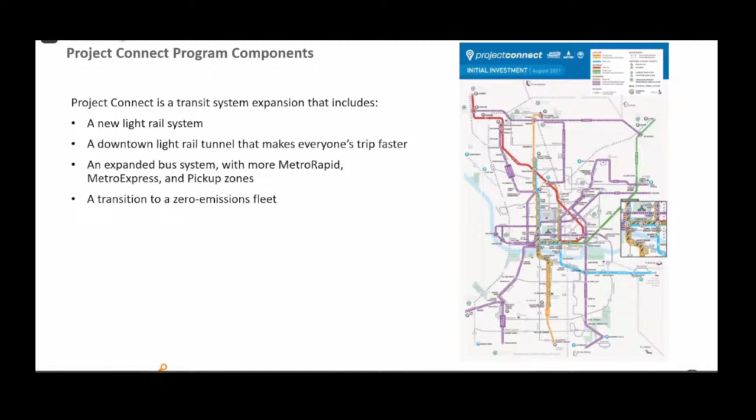So what do we mean when we talk about expanding transit? Do we expect that 100% of the people will ride our buses and trains 100% of the time? No. But every time we take a car, especially a single rider car, off of the road, everyone benefits.

Take a look at the little orange and yellow section of this moving image. Here you can see a lot more cars on the roadway, limited bus, and no dedicated transit lanes. Here we're only able to move 126 people through the roadway during each light cycle, assuming that 80 of them are riding transit.

On the right, with the blue-green side, we have fewer cars, a couple more buses, and a lane dedicated to transit. In the same light cycle, we can move 235 people through, with 204 of them in transit. That's more than 100 people getting through the intersection in the same light cycle. If you've ever sat behind anyone trying to get through light cycles and dreading that yellow-orange light, imagine 100 more of us being able to move through more effectively.

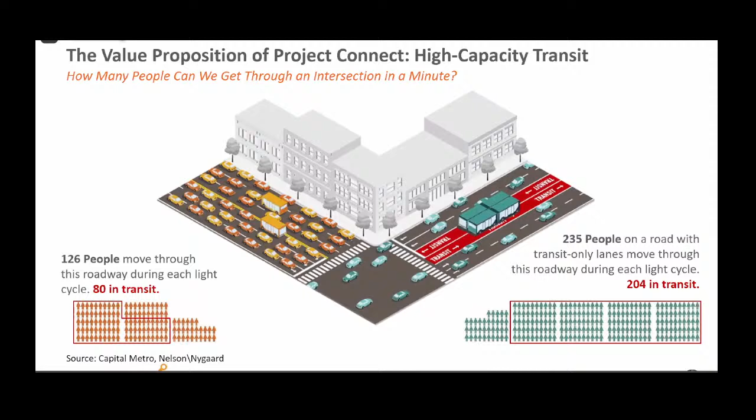What we like about Project Connect is that it reflects our community's values. We have opportunity and equity. Project Connect has already created thousands of good local jobs and will continue to do so, and it will provide more access to healthcare, education, employment, essential services, and entertainment, and will also create and maintain more affordable places to live.

Our second value is environmental sustainability. There's a shared passion in our community for the environment, and that's why our commitment to environmental and sustainable practices is core to Project Connect. We are already working towards our zero emission fleet and will continue to lean into the challenge to conserve and protect natural resources in the decisions we make.

And then finally, we have innovation and technology. Technology and innovation inspire much of who we are as a region here in Austin. Project Connect will embrace that spirit, making transportation smarter, more efficient, enjoyable, and easier to use.

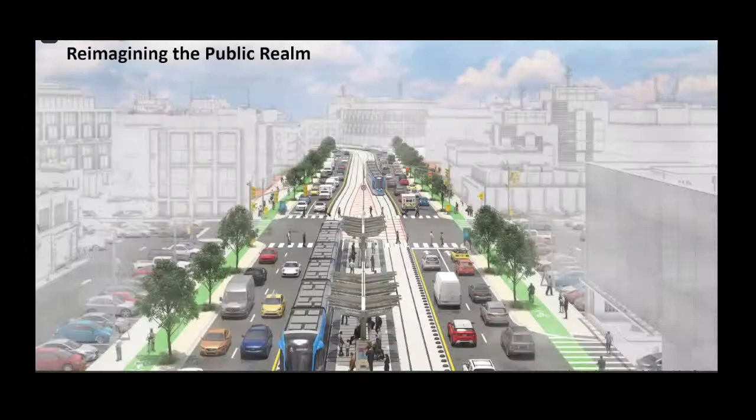And speaking of innovation, this project gives us an opportunity to reimagine the public realm. Here we have an artist rendering as an example of what transit could look like when the light rail system coexists with cars, bikes, and pedestrians.

It is an opportunity for us to bring local voices to the design table, like you're doing tonight, to improve accessibility for everyone while incorporating what makes us Austin, with public art for the average customer to appreciate daily, and for visitors to get a sense of who we are in Austin and how we work to keep it weird while we keep it moving.

And finally, you may be asking yourself, where are we in the process? We've completed 15% design so far, and here are our key milestones. We have entered into the project development phase for the Federal Transit Administration.

In the summer of 2022, we will have a draft of the environmental impact statement and our proposed 30% design. As my colleague Lonnie likes to say, we're baking it in clay, so the clay is not quite baked yet.

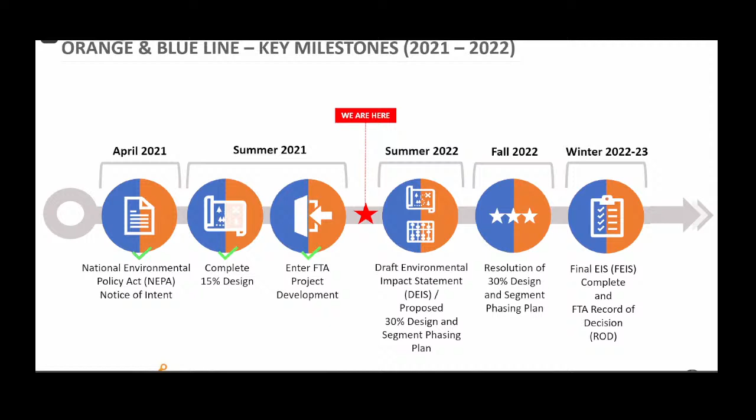By winter of 2022-2023, we aim to have our final environmental impact statement with a record of decision from the Federal Transit Administration. So with that, I'd like to turn things over to the woman behind the magic, our Deputy Project Manager for the Blue Line, Ms. Lindsay Wood. Thank you, Jocelyn.

I'll start with a high-level overview of the Blue Line project, just to set the context for the conversation as we dive in here today.

The Blue Line runs from downtown, from Republic Square to the airport, has a dedicated transit way, shares much of Metrobus Route 20, includes 10 planned stations, of which 2 are underground, 7 are at grade or at street level, and 1 is elevated at the airport.

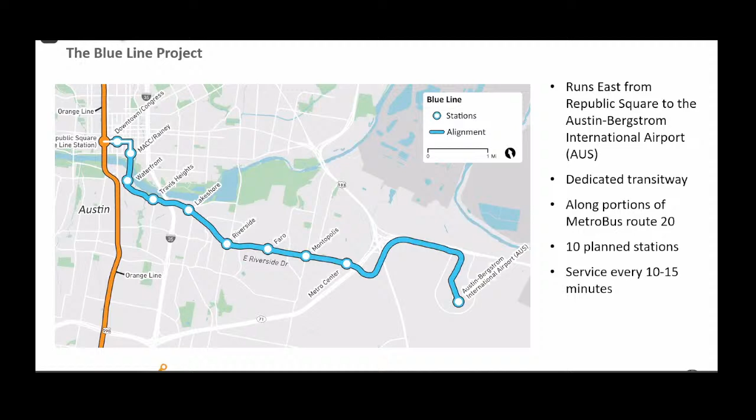And the service is planned to run every 10 to 15 minutes.

As part of the Blue Line, we have identified this area that we're going to be talking about today, covering the East Riverside Working Group study area from Faro Stations, Montopolis, the MetroCenter station, and to the airport. We'll be talking about the park and ride location identified in this portion of the corridor, and update everyone with the location of the station and park and ride that was not identified at the 15% level, but has since been evaluated, and want to discuss those updates.

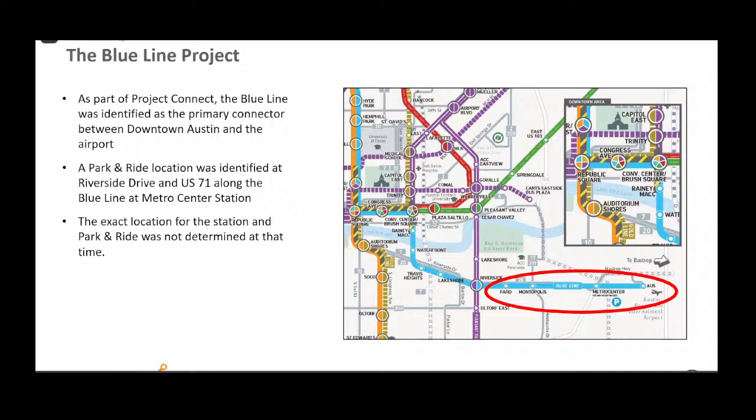I'll note that these plans we'll talk about today for the MetroCenter station, as well as the park and ride, and really the light rail as a whole, serve as the anchor for the East Riverside Corridor Master Plan, and are very consistent with the East Riverside Corridor Plan that included transit and a station in this area for the MetroCenter.

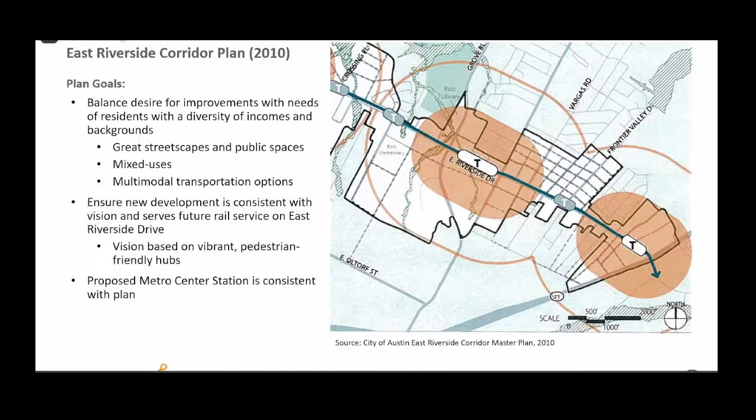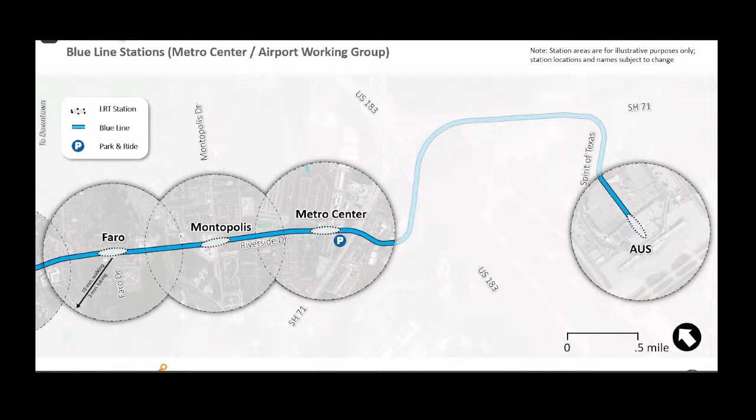So we're going to dive in shortly. I mentioned that we'll cover the area. We're going to start at the airport and work our way west and talk about that end of line station, then how we get to the MetroCenter station and the proposed park and ride, as well as cover the areas just to the west for the Montopolis and Faro stations.

Before we dive into the actual engineering drawings, I want to give a little bit of a guide into what you're about to see. We're going to walk through the design files themselves. Remember that these are live design files, draft, work in progress. You're getting a preview before we've actually even submitted the draft 30% designs that Jocelyn talked about in the program schedule a bit ago. So these are really live action, and we're seeking your input and feedback as we progress the designs.

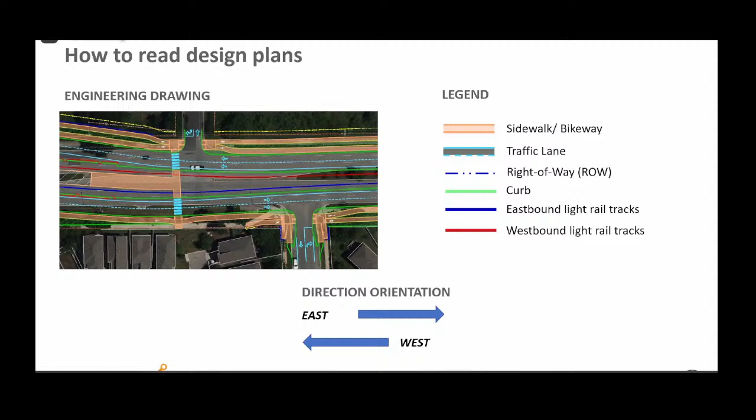So what you'll see are the aerial backgrounds, and in orange are the bicycle and pedestrian elements, so sidewalks, bikeways, in some cases a shared use path. You'll see the traffic lanes outlined in blue, the right of way in dark blue. The green indicates curbs, which may be the curb along the transit way as well as the outside curb along the roadway. And in the middle of the street, center running through here, you'll see the actual light rail tracks, with eastbound toward the airport in blue, and westbound toward downtown in red.

As I said, these are truly live action, in progress designs. There's much work to be done. We have a long ways to go between now and when this gets built, and this is the perfect time for community input and feedback. We really look forward to having a conversation about these concepts.

I'm getting excited, Lindsay. You know, when you get to this slide, it looks like that's it, folks. Thanks so much. But actually, no, we're going to take you in for a deep dive today, and we want to make sure you have an opportunity to participate.

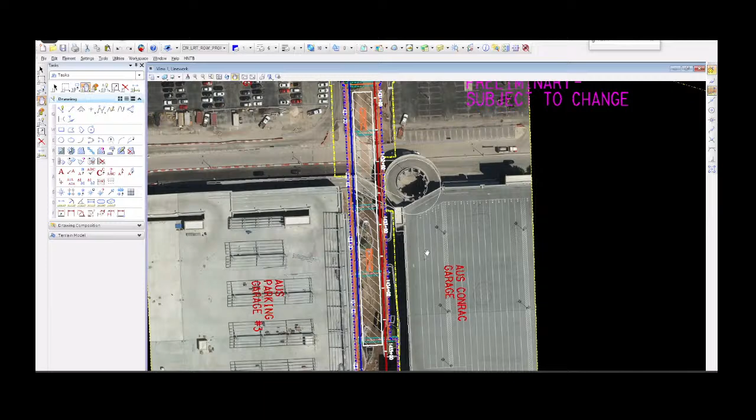All right, so it looks like we're looking at a space capsule. Where are we? We are at the airport. So our design begins with our connection to the airport. Here, what you see in the middle, that kind of hatched rectangle with the stripes on it, that is the station platform. And the context of that, how it fits in and what you will experience as a customer, is that this

platform is elevated about 30 feet high in the air. The reason for that is to connect directly to the planned future pedestrian connection into the terminal expansion that the airport is planning. So you would be able to get off the train, walk to the end of the platform there, between the two existing parking garages, with the blue garage on your left and the Conrac or rental car facility garage on your right, and walk straight due south into the terminal. I guess I've seen some people taking that final staircase up to catch an Uber or a Lyft.

So you know that space between those garages as well. Yes, and there will be what we call vertical circulation elements at the station. That means how do you get from ground level to the platform or vice versa. There will be elevators, stairs, and escalators to make those transfers as easy as possible.

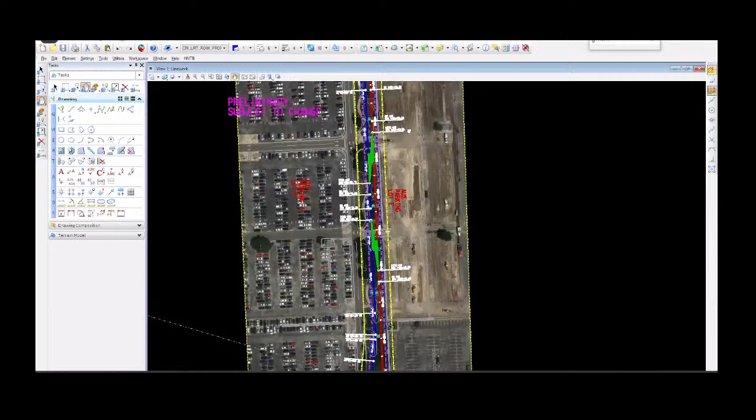So we start here at the end of line, and then we move to the north, staying on that roughly 30-foot high bridge throughout this area. And Josh, maybe pause here for just a moment.

I was going to ask you a question here, Lindsay, as well. Is there an easy way to tell when we're in the air versus on the ground?

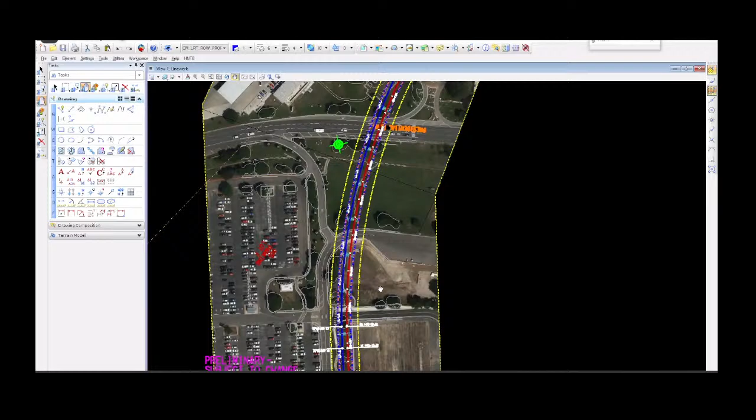Yeah, Josh, can you zoom in a little bit? So what you'll start to see through here, see those blue rectangles? Those are bridge supports, each of our piers, or we call them bents. So where you see that along the alignment, also outlined in orange, that overlaps where those white numbers are. That is the footprint of our bridge, or the outer edge of our bridge.

Later on, when we come back down to ground, you'll see that orange color become green. That's how you can distinguish between where we're in the air, if you have these bridge supports and you see that orange boundary, versus where we're on the ground, it'll be green and you won't have the bridge supports.

All right, I'll keep asking just because I've got color blindness, so we'll see how it goes.

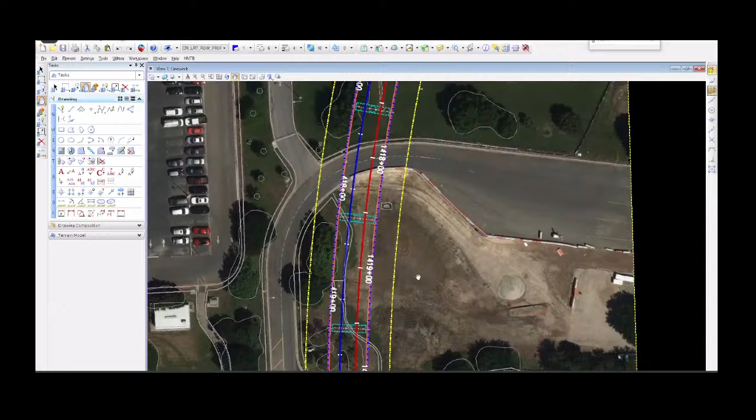All right, let's keep trucking. So through here, we come in between the surface parking lots, stay on that elevated bridge structure, and move toward SH71.

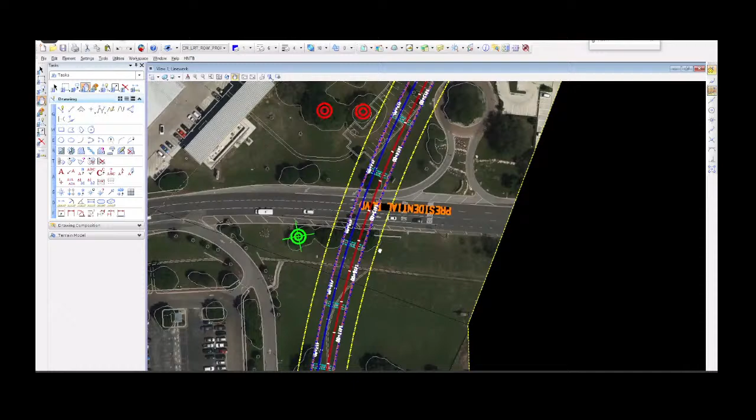We cross over Presidential, over some planned development along the airport property, and stay elevated really to minimize the impact of the project through here.

There's a slight gap in the aerials here. We'll move back out of it in a second.

And then we turn to go west at Spirit of Texas and cross over that, so no interaction of cars and trains here. We're still on a bridge well into the air.

And Josh, maybe pause here for a second. What you see on the north side of our alignment in that shaded light blue color is not part of the blue line, but we are coordinating very closely with TxDOT's planned expansion of the SH71 frontage road.

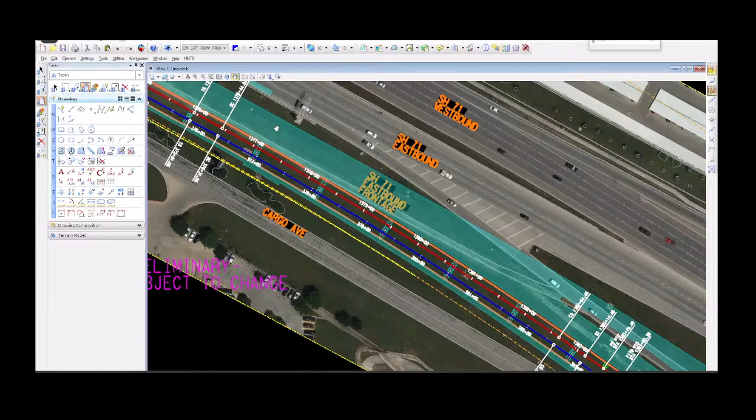So here you can see we're running right alongside it, elevated on a bridge beside them. And then as you go a little further west, we actually run on top of them and overlap the frontage road project below.

Through here, where you see those bridge supports again, those are called straddle bents because we're straddling over the roadway structure below. I'm assuming we've worked with TxDOT on this and they're on board with it as well.

Yes, we are coordinating very closely with TxDOT, not only for integrating the blue line plans with their frontage road plans, but also multiple utility relocations that are planned as part of TxDOT's project and that we need to make sure we're accommodating in the blue line project.

We'll still be up in the air at this point, correct? That's right, I can wave to everybody who is waiting for the shuttle at the parking spot at this location. Okay, great, and here we're at the parking spot, since you mentioned that.

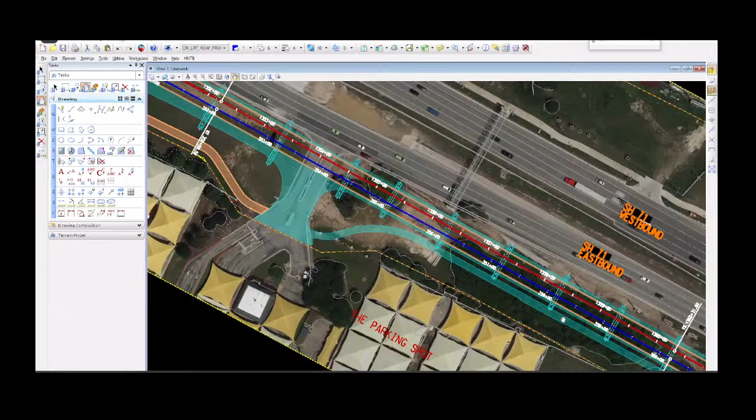I also want to highlight what you see as those curving alignments on the south side of our light rail here. On the right, where it's still blue, that is a shared use path planned by TxDOT as part of their 71 frontage road extension.

Where you see that turn to orange is a possible shared use path that could be built in conjunction with the blue line to help bridge the gap between TxDOT's shared use path and when we get over to East Riverside in a minute, where we connect with the

at street level bike and pedestrian improvements that run the full length of the Blue Line corridor. So this would fill that gap in between those two points of 183 and the parking spot that you see here.

Okay, so I heard that we're talking about a possible extension of that bike and pedestrian shared use path. So certainly if there are people in the audience who have strong feelings about it, you should let us know in the Q&A.

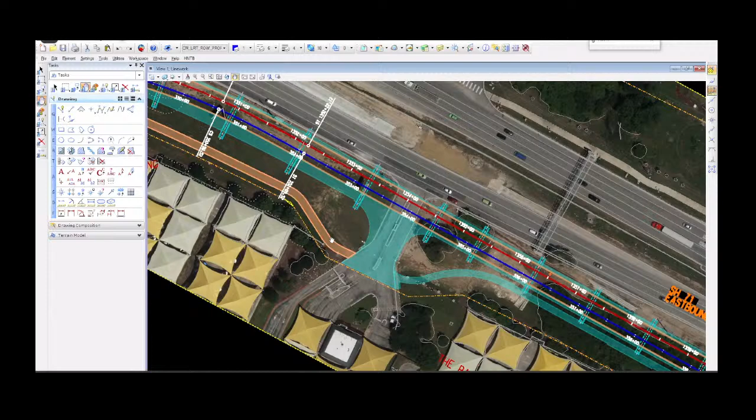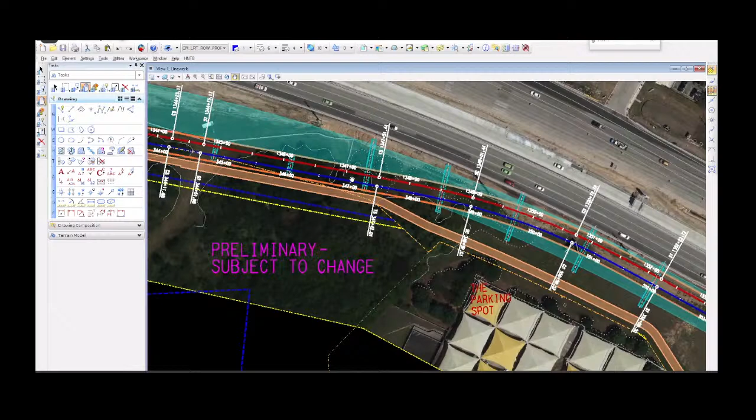Can you keep going, or are we going to take that across 183? We are, but before we get there, our light rail is still elevated through here. Before we get to 183, right about here, you see the orange line end, and that little red notched line - Josh, maybe zoom in there. That's a retaining wall, the transition to come down from an elevated bridge structure to get down to ground level, where you switch to the green line.

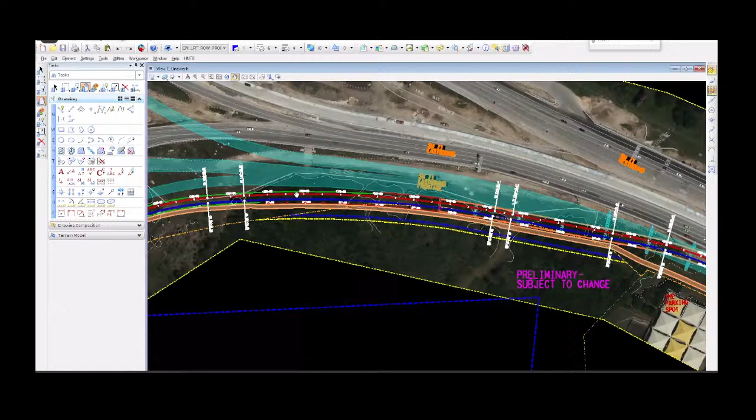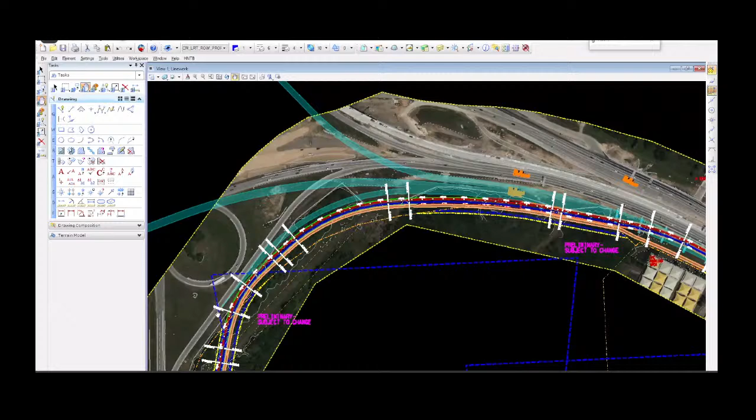And now our transit way is at grade or at ground level. The reason we do that is if you zoom out, you'll see these big blue triangles or wedges through here - those are the runway protection zones for the airport, a federally mandated space where we need to not be elevated. Also there are some very large and very high overhead electric Austin Energy transmission lines that we need to not have a conflict with. So we come down and go under those and stay at ground level through that runway protection zone.

We come around, make that corner. So now on your left, you're seeing 183. Let's zoom back out just a little bit. We come back up, so you see that red notched line again - that's our retaining wall to transition back onto a bridge.

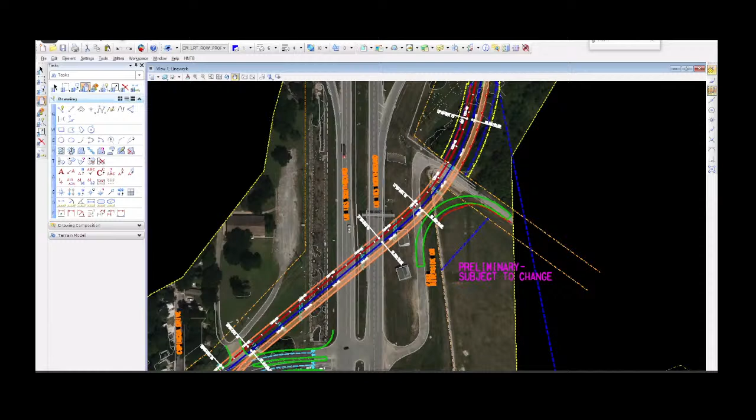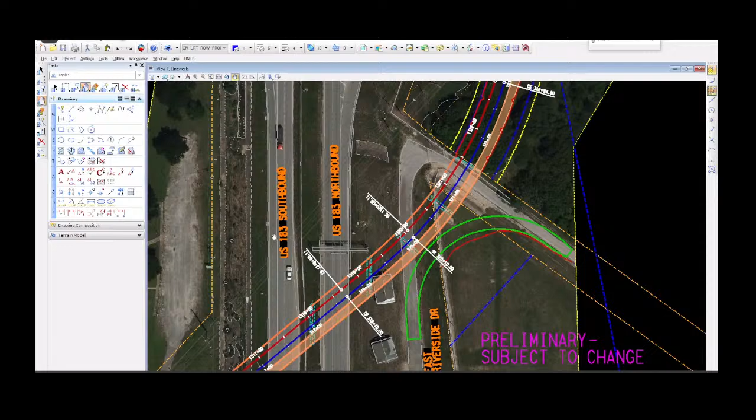And it looks like you're taking that 183 shared use path with you. That's right, creating a possible connection for that bike and ped, really a safe movement to bridge the gap between 183 and that parking spot location I showed for TxDOT's shared use path. So then we come over 183 to the west.

Now the roadway you see here is East Riverside Drive. Through here, we wanted to stay elevated for a little ways beyond 183 for two reasons. One is maintaining access to the neighborhood - you see Palma Verde right there, making sure we're not coming down on a retaining wall and blocking access to that street where you wouldn't be able to turn across from East Riverside to Palma Verde if we were blocking that with the big wall in the middle of the roadway. Also to maintain access to the church driveway you see just on the top of the screen there. So this allows us to maintain full accessibility to these areas.

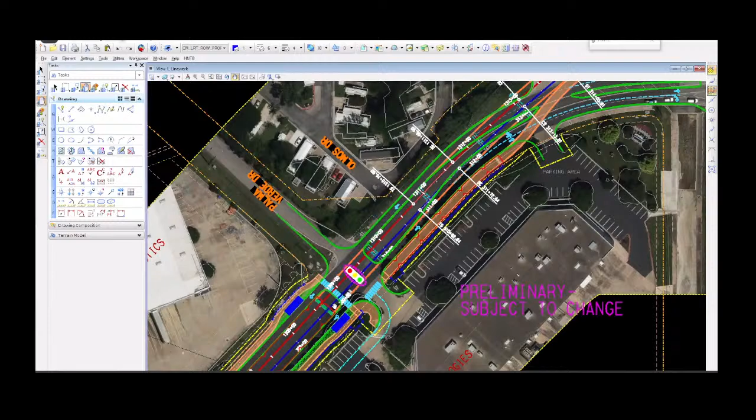And then immediately on the other side of Palma Plaza, we come down off of our bridge. We're center running, so we're in the middle of the roadway, meaning the eastbound lanes of Riverside are on one side of the transit way and the westbound are on the other.

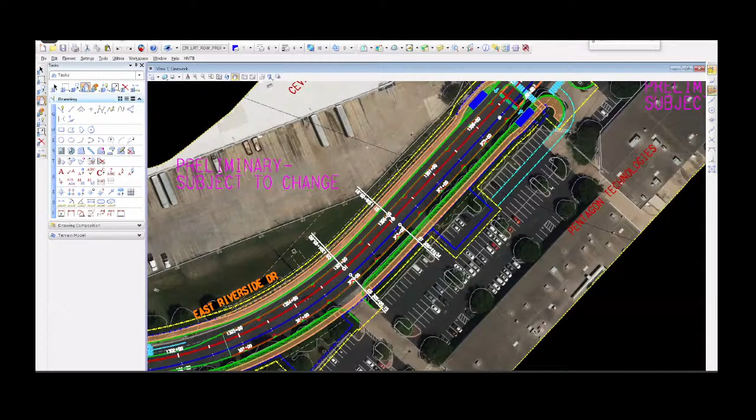Before you keep going, I'm starting to see some new shapes and colors there. Some of it is obvious - I see the crosswalk that's in, to me it looks like light blue. And those blue boxes, those are bus stops, right? They are, yes. And with the new standard, bike lanes go around the bus stop on the outer end. And a signalized intersection - I also saw that you still maintain vehicular access to 183 on this street. Yes, East Riverside continues sort of below our transit way to connect, as it does today, to 183.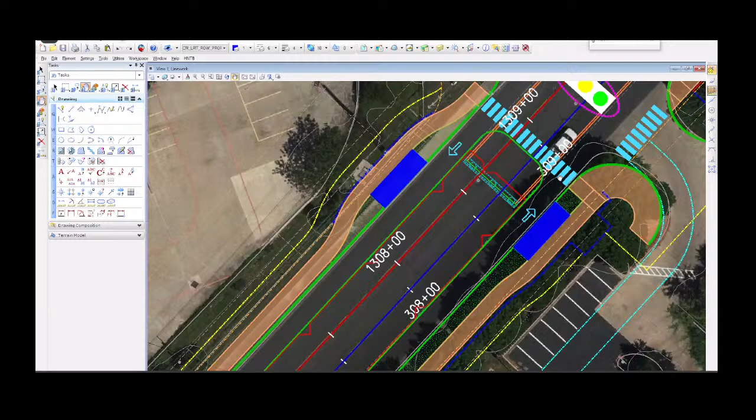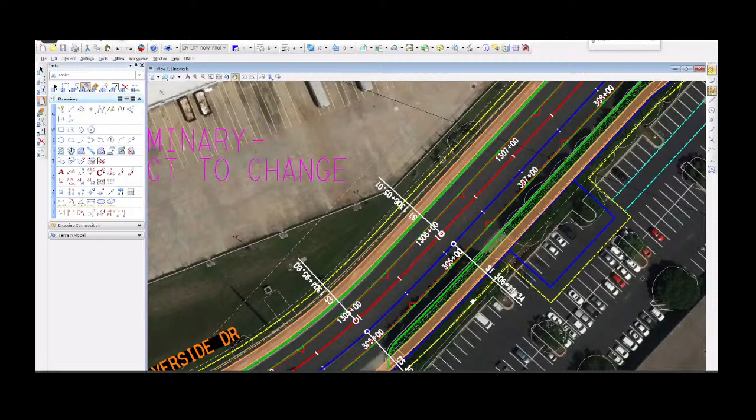Okay, let's keep on trucking. We had some questions in the Q&A, and the team has been responding to some of them. They asked about the max speed of the trains in the section from MetroCenter to the terminal. Where we're street running, we're generally at a design speed of 35. Where we're grade separated, meaning not sharing the street or not at street level, we have a higher design speed of 55 or up.

There was one other question about the master plan for the airport, realigning 71 a little further north - is that going to impact our projects in the long run? Because right now we're directly next to the existing right-of-way. It's on the other side of 71 from where our proposed blue line alignment is that I just showed everyone. But there are some considerations for potential maintenance facilities in that area.

Those plans are being considered as part of finding a place for a maintenance facility that hasn't been found yet.

You'll see along the line some areas that jog out for proposed right-of-way that deviate from the main corridor. This one is for a traction power substation, which is a required systems element to operate the light rail. It generates the power that gets distributed to the trains via the overhead contact system, the technical term for the wires that run above the trains and distribute electrical power to the light rail vehicles.

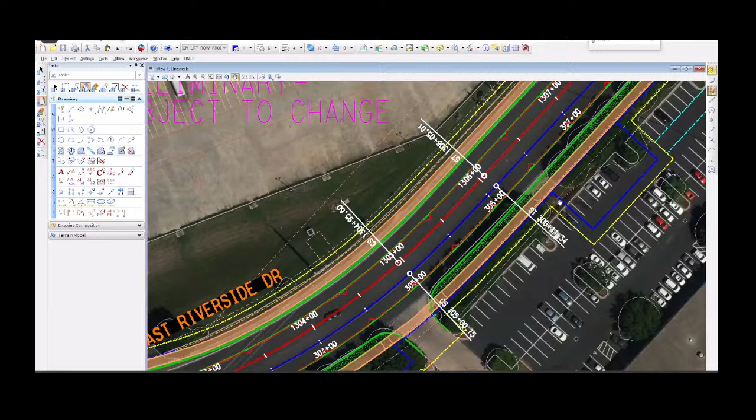So that is a footprint, generally a preliminary footprint for a traction power substation. They're generally spaced roughly about a mile apart along the full corridor, and you might see some of those as we go.

You'll also see some different shapes that aren't quite as rectangular, and this is an example of a water quality pond. In order to meet the design criteria for the program and protect the water quality of the region, there are various biofiltration ponds located along the corridor.

I mentioned the signalized intersection at Palma Verde. You see one here at Hoeke, but anywhere you don't have a signalized intersection would not have turns permitted across the transit way. So some of these driveways become right in, right out, because it is not safe to make a left turn across the transit way without that protected movement and protected lane. That left turn will only be at signalized intersections.

I suspect when we move a little further west, we'll get some more pointed questions about that. I'd encourage people watching to put your questions in the Q&A or raise your hand, and we can call on you - it'll be just like a call-in radio show tonight.

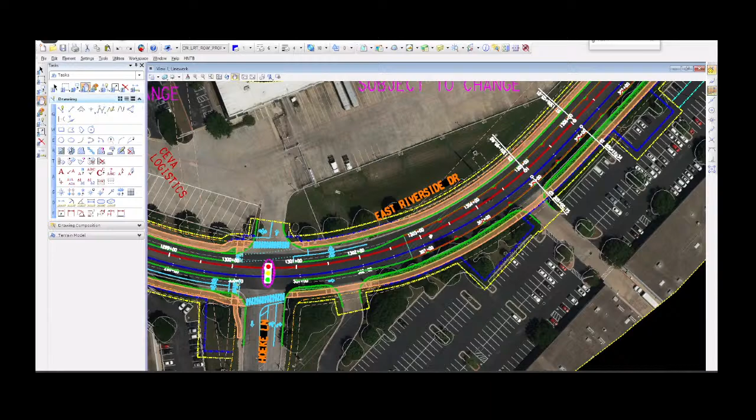Let's keep going, we'll keep approaching the west here. So here we're at Hoeke, again street level, center running all through this area. We come up on the MetroCenter intersection, and you see those water quality ponds coming on both sides there again.

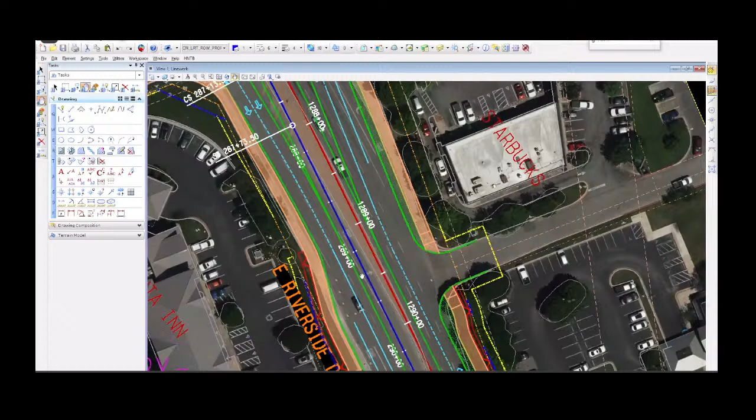MetroCenter being signalized. Now we're getting to Ben White, crossing over here. I know there's been questions before - do we need to rebuild this bridge or can we work with the existing bridge? This bridge was actually designed and built to accommodate light rail. It was planned and coordinated with TxDOT years ago to accommodate a potential light rail line through here. So yay TxDOT, yay us, yay city for thinking through that well in advance of this project ever existing.

There is a thicker bridge deck in the middle of that existing bridge that can accommodate coming back in and embedding light rail in the transit way through the middle. However, putting the transit way in the middle, we still need to maintain the existing capacity of that bridge. So we need to widen the bridge out on both sides to maintain the existing roadway lane capacity on the outside of the transit way, and also add new bike-ped connectivity across with shared use paths shown here in orange on both sides.

That is really great - it's pretty uncomfortable to cross highways, so it's nice to know there'll be an improvement there too.

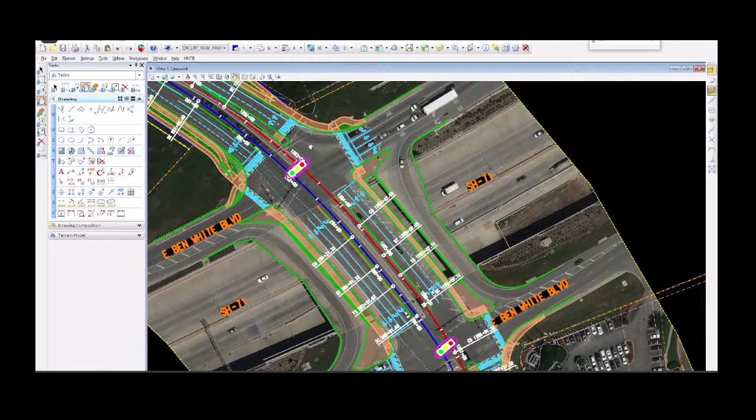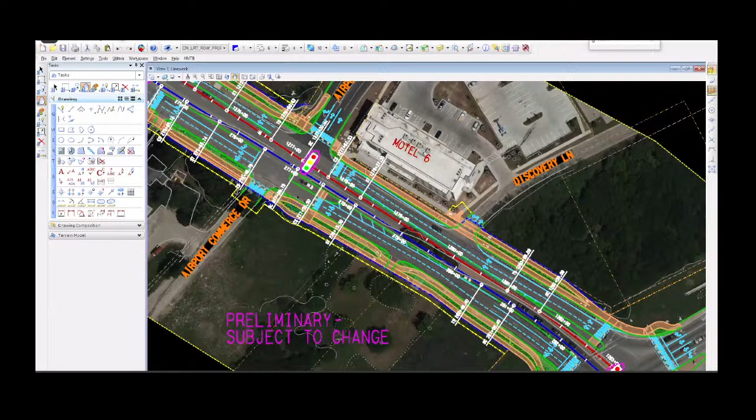All right, so now we come up onto the MetroCenter station area here west, or I guess depending on your perspective, north of 71. This one's a weird angle, it's always hard for me to pick a direction there. And we approach the station here at Coriander.

You'll see that platform in the middle - it's a center platform, street level. The platforms are raised a little bit above the top of rail, which the rails are flush with the roadway, and the platform's a little over a foot higher. The reason for that is to have fully level boarding, so that when you step off the train, you're stepping onto a flush surface with the boarding level of the train.

Since that is a little bit higher than where the wheel of the train hits the rail, that means we have ramps approaching that platform level, and that's what you see there in orange.

So you come into the median area for the station via crosswalks in light blue, then ramp up to the platform level in orange. That's a new pedestrian hybrid beacon there, in addition to the signalized intersection on Coriander. We want double-ended access, meaning you can access both ends of the station at the platform. In most cases, a signalized intersection allows for that access, but where we don't, like on the west end of the platform, we have pedestrian hybrid beacon or PHB crossings.

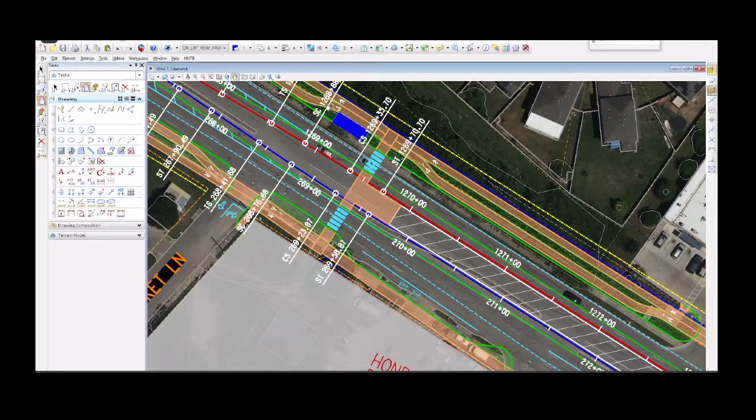On the south side, along the eastbound lanes of Riverside, it connects running parallel to the roadway, behind the curb - think of the curb as a step up from the roadway. On the north side, you have separate bicycle and pedestrian facilities. So the south side, where it's one path, that's a shared use path. On the north side they're separated, with a sidewalk and then a bike lane, and the space in between can be a place for planting street trees and creating shade.

Thanks for that. And I know further up the line, Andrew, there's discussion about trying to go up and over 183, because as a bicyclist it's pretty uncomfortable to try to cross that street. So there's potential for making that connection with this project.

I'm also going to go to a question in the chat. Ron Thrower was asking, why name it Metro Center when it's not near Metro Center? I want to take that one and say the names on the map are for planning purposes. The name we ultimately select will come from people like you. If you live in the neighborhood and have ideas for what we could be naming a park and ride or a station in this area, we'd like to hear those, because we'd much rather name it something meaningful for the community than something referencing a business park on the other side of the highway. That's for sure.

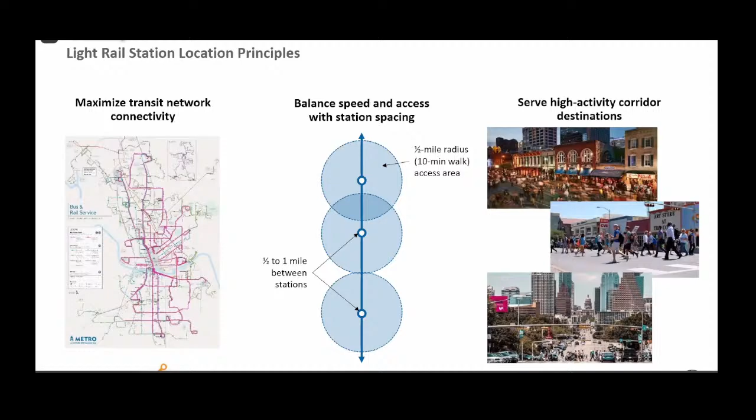So we look at high activity corridor destinations and origins. And then we have to work within the design criteria of the light rail system. Light rail vehicles are very particular about where they can go and how they can move. We need a certain amount of tangent or straight track for them to stop at the station, since the platform itself can't be on a curve. We also need enough straight area for them to have a buffer before and after the station to meet that criteria.

All of those things combined in this area led to what were, in the 15% design, two different options for station locations. Site 1 was actually at Metro Center and was the reason it was named that for the time being, for planning purposes, as Lonnie mentioned. Just to not confuse people and give a new name, we're keeping that name as we look at this new Site 2, now the proposed location for the Metro Center station.

So I'll talk a little bit about why Site 2 versus Site 1.

I'll also note that this station, the Metro Center station, has been identified for a proposed park and ride because it's the farthest east, or closest to the end of line station, that does not require entrance onto the airport property. I can tell you, Lindsay, we got lots of questions when I was at Cap Metro just asking, where's the park and ride on Riverside? Now we might actually get to have an answer for that question.

We don't expect that everybody is going to live, work, or want to go somewhere that's right along the blue line. We want to make the line accessible for those that are a little further off the corridor to come in, park, and ride the train to wherever they may be going. Or even connect to the orange line downtown and go further across town, or ride the red line, or connect to any of the Metro Rapid routes that the blue line connects with and crosses.

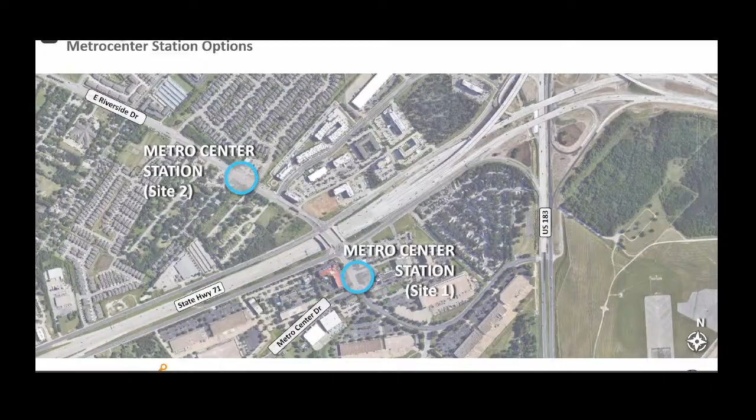Going into that first option that was shown as a possibility in the 15% design, as design progressed we came across some challenges with this location. One is that to actually have the minimum length of straight track needed for the platform here, it would have blocked the MetroCenter intersection itself while being center running. That would have meant someone coming from 183 and going westbound along Riverside wouldn't have been able to turn left and get to MetroCenter because a platform would have been an obstruction in the way. That really made access challenging for all of these businesses and properties, many of which you can't even see on the view of this screen that continue down MetroCenter because there's not another great way to get there. So that was one challenge.

Another option we looked at was to mitigate that challenge by pushing the platform to the north side of the roadway and make it what we call side running instead of center running. What that ended up doing is cutting off access to all of these properties. So it kind of fixed one problem and created another. The other challenge is that it would have required transitioning from that center running alignment to the side running one on the north side across TxDOT's 71 bridge. That takes more space to make that transition and curve the roadway from one spot to the other, and that would have prevented maintaining the existing lane or vehicular capacity across that bridge, which is not technically feasible or acceptable from a design standpoint.

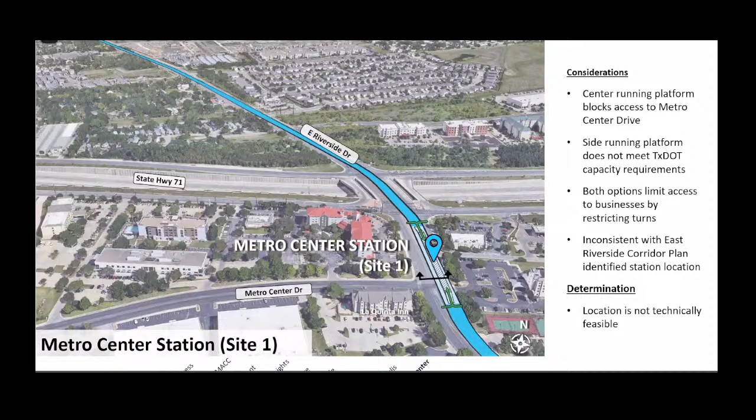So long story short, it was determined to not be technically feasible to advance this site 1 option into the 30% design. That brings us to where we are today with the proposed concept over at Coriander. Here we avoided those issues and are able to stay center running and not block or cut off access to the businesses and homes and properties on both sides here. It also has some great transit supportive land uses. You'll see lots of homes and neighborhoods, and there's new development coming up all the time in this area. Those will both support the ridership for the light rail and also benefit from access to the light rail.

As an aside, Lindsay, as you're moving in here, I'm starting to see a lively chat going on about naming in this area. I want to thank you all for putting names into the chat. I've just been looking at this, you know, naming it after Annie's Day and Night building, Anacita Limon Fernandez Rivera Station. I've also seen another one coming into the chat as well. I'd love it if you have an idea that you could share it with us. We'd definitely be willing to read them on screen if you did.

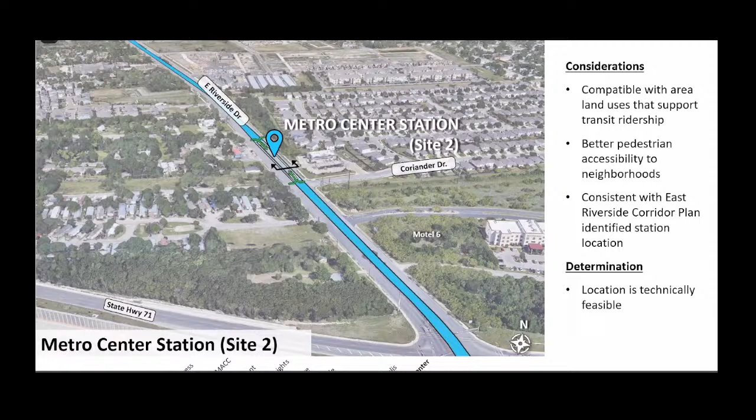I know that there are some other questions in the chat. We will get to them after we talk about the park and ride location, and we'll circle back to some of those questions about bus lanes and bike lanes in this corridor. So let's continue, Lindsay.

All right, perfect timing. We'll talk about the park and ride. So we mentioned why we want a park and ride for the MetroCenter station, and that brings us to where can it go? It's challenging to find undeveloped land anywhere along East Riverside. What isn't developed today has a new site plan popping up tomorrow, and it's all very fluid and being developed as we speak.

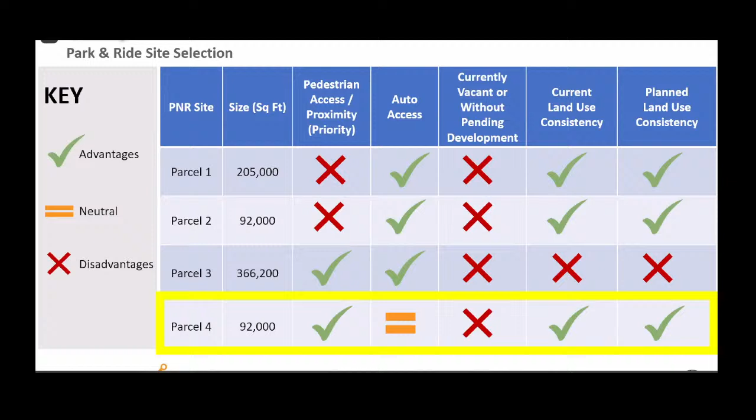Before we get there, the questions are really about the specific design of the park and ride. And I know we keep talking about the park and ride as a place you park and you ride, but does it have to be a surface parking lot? Why is this being built in there, and could it be something more?

Yeah, great questions. So this site that has been identified as the concept for the 30% design includes roughly 150 parking spaces. And we'll note that there may be future demand that exceeds that, so future development for maybe a garage in a later phase might need to be considered. But at this time, for the initial opening operations, it's planned to be a surface parking lot. Right now we're more concerned about the footprint than the specific use in the future.

Yes, and also the park and ride would have additional amenities: ticket vending, public restrooms, information offices, metro bikes, scooters, food trucks. So you can't pass up an opportunity for good tacos in town. Those sorts of amenities will be further designed as the design progresses into later stages.

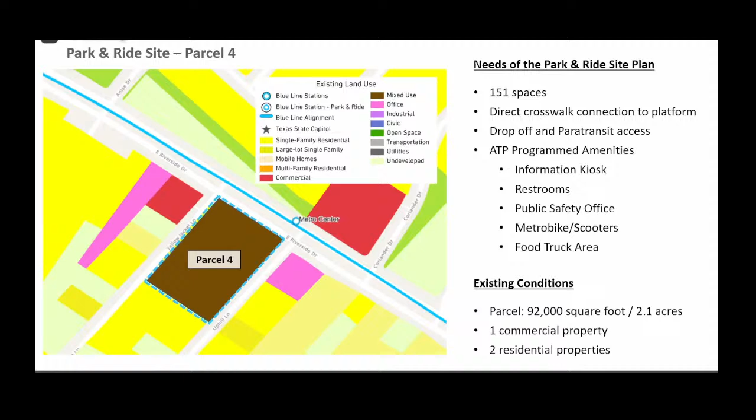Okay, so our next step was that we were going to move west of here. Do we want to? Well, I do have some questions about this parking lot. Katie Carmichael asks, can you expand on the safety and security aspects of the parking lot?

Safety and security, sure. As design progresses, we go through various safety and security analyses, including something we call CPTED, or crime prevention through environmental design. That's a mouthful of an acronym, but safety and security are absolutely criteria in the design process.

Through that process, we look at things like lighting and clear sight lines, and having a public safety office is actually planned here, with attendants from Capital Metro that staff this area and support the public safety of the facility. Those details will continue to be advanced, but are absolutely at the forefront of mind to make sure people feel safe and secure in using this facility.

And then I've got another question here from Marty Combs. It's not specific to the park and ride, it's specific to the platform. Marty's wondering, how many train cars can the platforms accommodate when the line starts running? Sure, so we don't know the exact vehicle yet.

ATP, or Austin Transit Partnership, will go through a selection process coming up to evaluate different options for a specific light rail vehicle. But I'll speak in general terms. An individual train might be in the order of magnitude of 100 to 130 feet long. So 3 of those - we call it a consist when you piece those trains together.

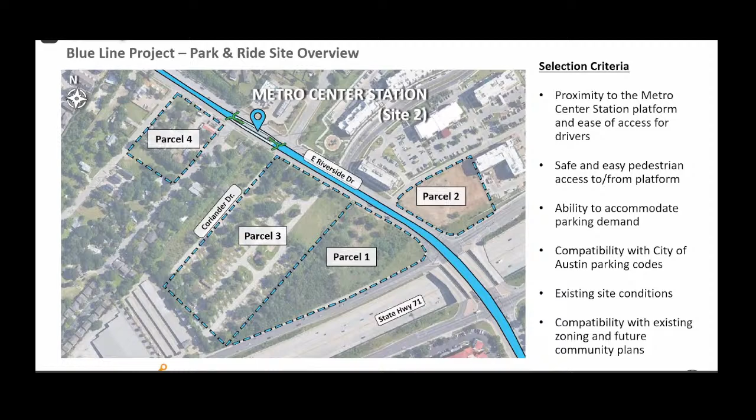It'd be safe for us to continue down the street, since some of these questions will also be relevant as we move to Montopolis and Faro. It'd be exciting to show some of that. Not as much has changed as the MetroCenter location, but it's still helpful to see where we are at the moment. Again, this is written in clay—we're hoping you can give us feedback that will help solidify this plan when we reach the 30% design rollout this summer.

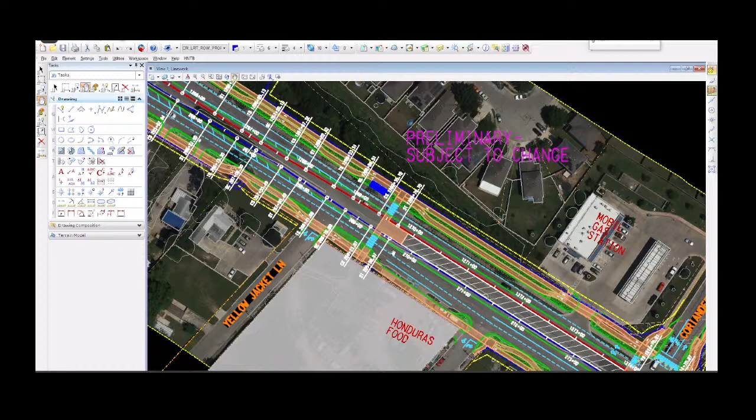Thanks, Lonnie. Josh, if you can pan to the west, we'll leave the MetroCenter station, headed towards Montopolis. You'll see some shapes outside the right-of-way again—those are for water quality ponds. This one to the left is actually a drainage area, with a culvert and a head wall where you outfall from that culvert, so there's a drainage easement surrounding that.

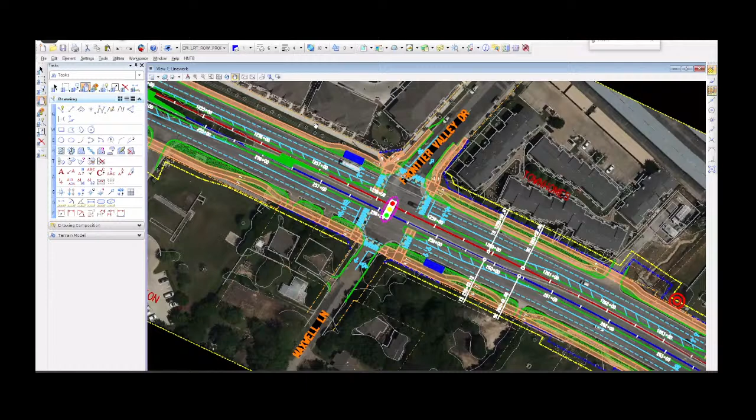There's still a left-hand turn lane into Maxwell heading westbound. We have left turn lanes in both directions here, which will help for the school in that area—if you're going eastbound you can turn left to Frontier Valley, and if westbound you can turn left to Maxwell. Then you continue going west.

If you're wondering what these green triangles are in the middle—those are what we call crossovers, a special kind of track that connects from one track to the other, allowing operating flexibility for the train to move to the other track.

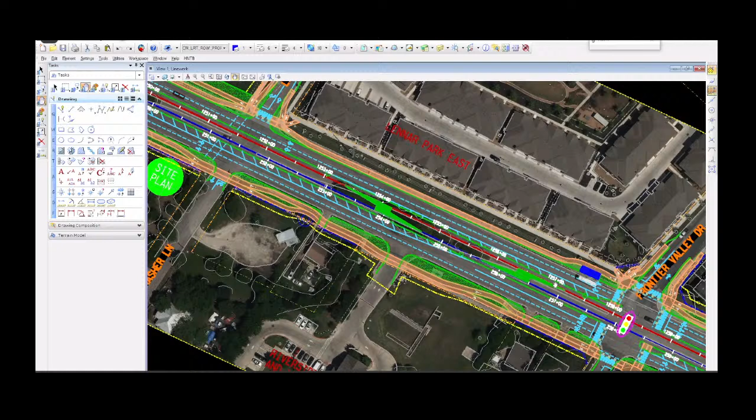Cool. I'm glad there's enough room there for that.

I see this hatched line—what is this hatched blue line there in the middle? That's not a platform, right? No, it's a striped out area of the roadway, which generally occurs because we're dropping from a left turn lane to where we go back to not having one. So you can see that left turn lane just to your right, and there's that kind of area in between where the lane has dropped.

You might be wondering, why wouldn't you have a left turn lane here, and why not have them everywhere throughout the corridor? In this particular location, there's an intersection nearby that we just talked about, Frontier and Maxwell. Adding additional left turn lanes here increases the right-of-way footprint and increases property impacts on both sides, so we tried to be thoughtful about where we put those left turns—there are some locations where we don't have them because of the impact of fitting them in.

Let's take a look further up the street towards Vargas and Montopolis, since I'm sure people are going to want to see it. Good, there's a signalized intersection there at Vargas. I've been wondering, because I know IDEA Montopolis is there on Vargas, so that's a big destination for people in cars, for sure.

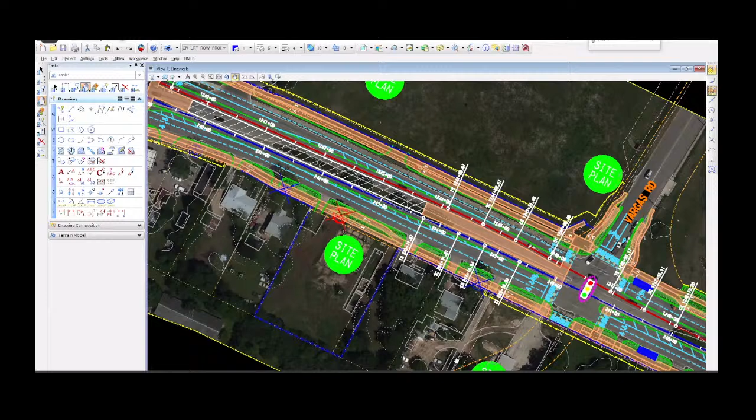Yes, and you also might notice all these green circles everywhere—these are some of those developments popping up all along this area, including directly across Vargas, where you can sort of see those dashed orange lines—it's actually going to punch through under the proposed development there. So yes, we've learned something new tonight, folks.

We have a left turn here, and you can keep going. You're starting to see the east end of our Montopolis station. On the right side there, you see that ramp—that connects from the nearest cross street into the median, walking into the center platform where you can board the train going in either direction.

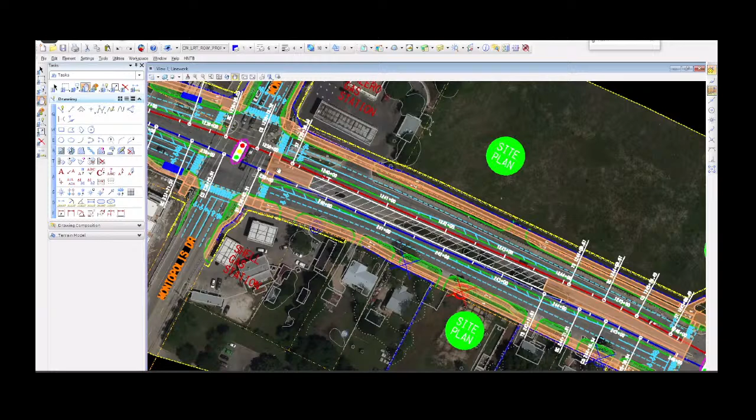And you have the same on the left, or west side, of the station at the actual Montopolis intersection. So to be clear, that orange I'm seeing to the left and right of that hatched platform, that's a special concrete walkway to get to the platform, correct?

Yes, that's correct. I do see there's a question in the audience from Chris Gregassi. I'm going to try to allow you to talk, but you may have to unmute. Chris, are you there?

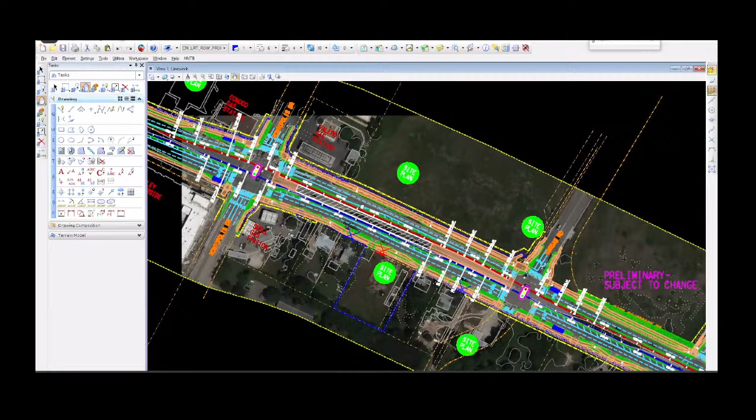Yes, can you hear me? I can, go ahead. That parcel between Uphill and Yellow Jacket, that's parcel 4, correct? Let's go back to that parcel for a sec. So let's see, it was Lawrence, then Frontier, then Anise, then there's Yellow Jacket and Uphill.

So between Yellow Jacket and Uphill? Correct. Now, aren't there homes in there? That's not vacant, aren't there people living in their homes there? There is a residence, and there's a food truck and a salon.

So there are displacements associated with that park and ride site. And how do you displace those people? You help relocate them, so they have to be fairly compensated and go through a very specific process, not only acquiring the land at fair market value but also providing relocation assistance.

So that whole parcel is not one owner, it's not owned by one person? That's correct, multiple owners. Okay, that was not clear. Now it's clear, thank you.

Thanks again for bringing that up, Chris. I think he brings up a pretty good point there. Again, there is a right-of-way acquisition team. They will work to assess the value of the property and make offers to property owners. In addition, they will help provide funding for search and relocation assistance, so there should be no expense incurred for that move. But to your point, there are a few property owners in this location, so we'll be working with all three to determine if this site will work. Thanks for bringing that up, Chris.

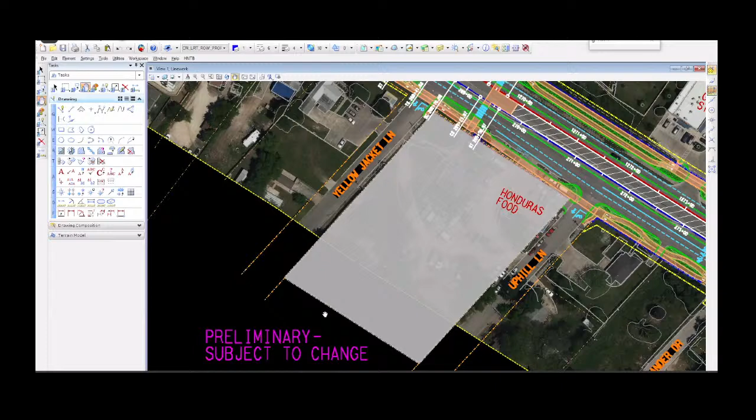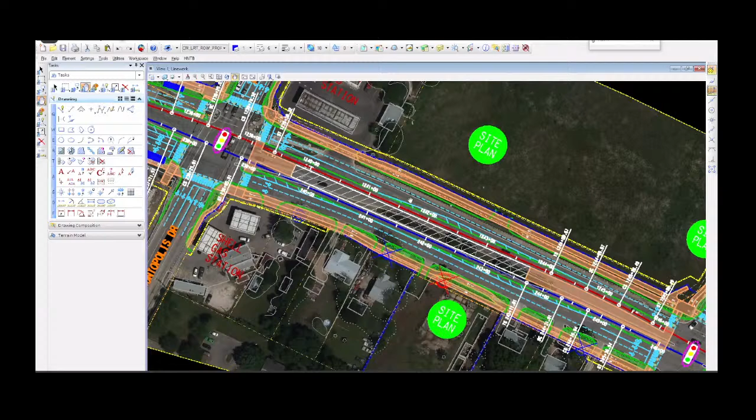And then let's slide back to where we were, because we were up at Montopolis, and I swear I want to get to Faro. I know I heard a question about some of the land near Faro, and I'd love to get there. So we're back at Montopolis, we're at the platform. Take it away, Lindsay. Okay, Josh, keep going to your west.

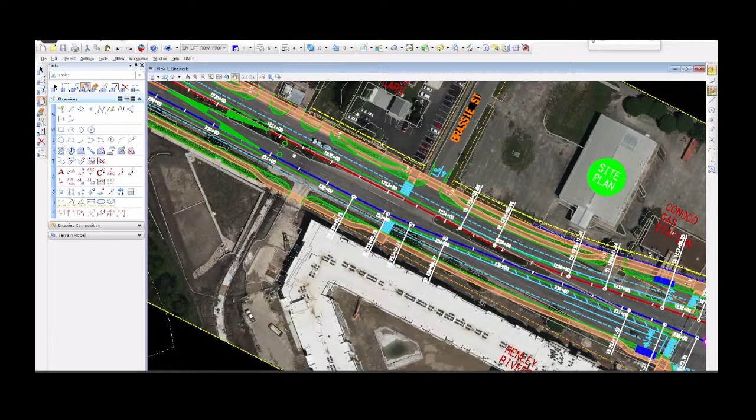Again, we're street level, center running. Go back a little to your right. Yeah, we're not that far. Pedestrian crossing here. Okay, so that's another pedestrian hybrid beacon, exciting to serve that new building that's there to get to the other side.

Great, going. You see those crossovers again, and here we actually have a storage track in the middle that allows for a staging area for trains, for whatever reason needed, to pull a train off the main track temporarily before bringing it back on, without blocking operations of the main track. Now, I think this area to the south here looks like there's partly a water retention there, right?

Yeah, scroll a little to the west so we can show where we're at. So we're at Grove, and that box off to the south, at the bottom of the screen, is another potential systems footprint—we might have a traction power substation there. I'll note that's very in progress, and we're also looking at other options for where that might need to be, so that's a very preliminary but possible location.

Owned lot, isn't it? Isn't that something the city's working to develop in that area? Yes, for affordable housing, which will be a wonderful development so near the stations through here. And it's almost equidistant between the Montopolis station and the Faro station, so you have a short, less than a quarter mile walking distance either way from this property.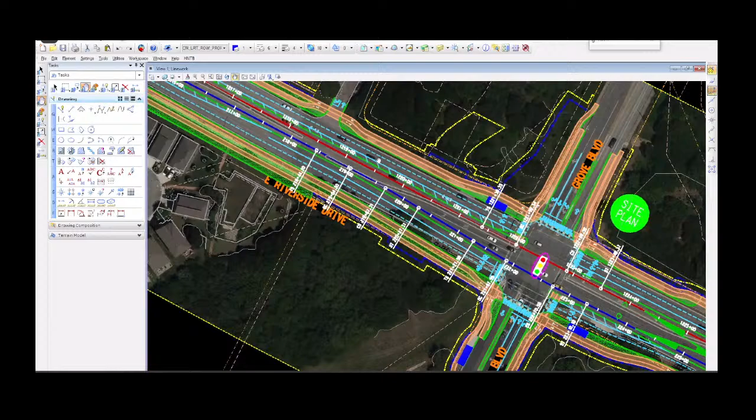We're coming up to the Faro station. This one's a little different in that the topography or the ground conditions through here are a little less compatible with light rail. It's a little bit of a roller coaster. It does a little bit of an up and down kind of dip, and the trains can't do that.

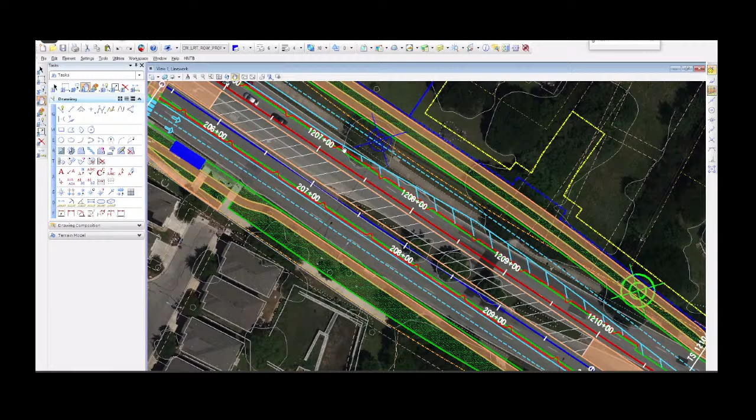So in this area, in order to make that work, what we have, you see those red notched lines again in the middle, Josh, maybe zoom in a little bit so we can see those. Those are retaining walls alongside the transit way. So the trains or the transit way are actually elevated a bit above the roadway that stays at existing ground level below it in order to basically flatten the grades to make them work for light rail design criteria through here. But then we're back flush with the intersection so that you can still cross the transit way where you have the intersections.

So I know that Lisa Lakey was asking some questions here. Can you, looking at the north side of the street between Faro and Pennock, show us where the existing right-of-way line is and what's going to be past it? Because I think my understanding is the neighborhood that's just north, that this strip is like part of their neighborhood. And so they've had a lot of questions about this and what's planned in that area.

Yes, Josh, can you zoom way in so we can see? There we go. All right, see that orangish dashed line? That's existing right of way. Then the blue dashed line is proposed.

So you see here we have the two separate bike and pedestrian or sidewalk facilities here. That's that shaded area in orange, and the green street trees in between them. And that's what pushes that right of way out here to provide that connectivity for the bike and pedestrian elements along the corridor. And that does move beyond the existing right of way that you can see here.

In case you're wondering what the yellow lines are, those are not right of way. It's a footprint for potential access during construction. It's temporary only, but just noting that you sometimes need a little bit of access outside of the footprint that you're actually building, temporarily only, but is not for the right of way and not any kind of permanent impact.

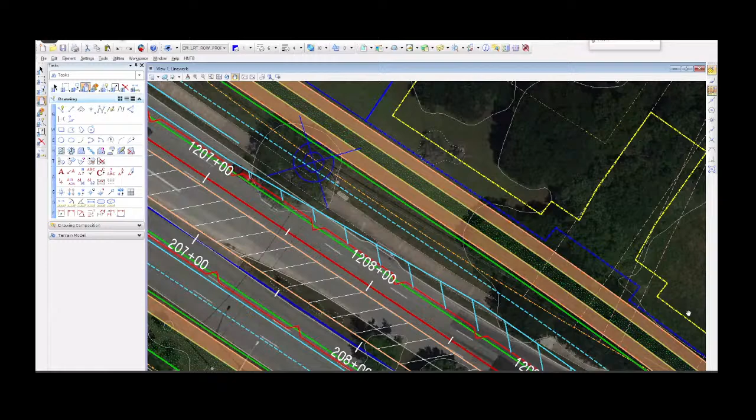Are we able to zoom out a little further just to see how close the houses are to that? There we go. Yes, so it's not impacting the right of way. It looks like there's the right of way lines for each of those lots. You're not going into any of those home lots. We are outside of the individual residential properties, but it is common property to the neighborhood. That is where that proposed right-of-way line is.

And if you're wondering what that blue box is there, that's another potential preliminary location for some of those systems elements that I mentioned. In this case, what is called a communications and train control bungalow, which is sort of a box that houses the required equipment that has to be at every station location. That is how the trains communicate with the signals and how they are controlled. The operations are controlled along the line.

So kind of like those control boxes at every street light that you see downtown with the little pergolas over them, similar. And in the case of the transit systems, although not at this design stage, there are some really neat opportunities to screen those to make them a little more aesthetically pleasing than, say, some of those traffic signal boxes that you're used to seeing. Those can be incorporated into art programs, and it's a great place for input from the community in terms of how those get put into the surrounding community fabric without being such a visual obstruction.

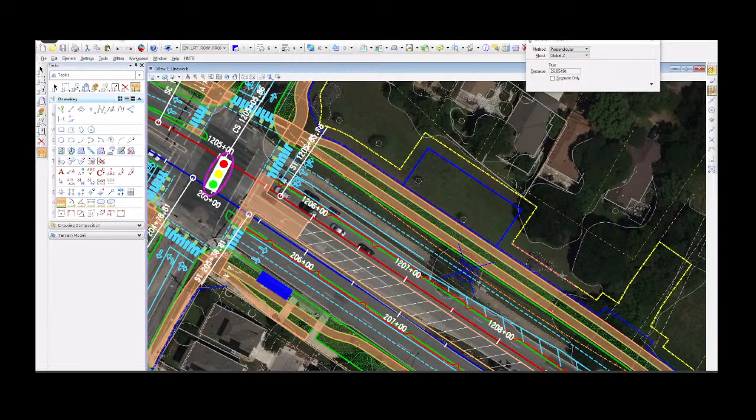Also, I see Lisa Lakey has her hand raised. If you unmute, you should be able to get on the air. Looking good, say hello Lisa. Oh no. Well Lisa, I can't hear you for some reason. I bet if you have a headphone plugged in, if you unplug it that might actually work. Hello, I think now, can you hear me? Yes I can. Terrific, we can hear you. Can you hear me? Yes.

Okay good. Well, I wanted to second what the previous speaker said about that berm there. It has nice swales, and there's been an emphasis by the Crossing Place Neighborhood Association, which is contiguous to this, to even grow natural grass on the area and so forth. I know that... well, so that's one issue.

The second issue is regarding noise. You mentioned the quietness of the bus, but now we're going to have the transit of the train. The train is now going to be there, and the traffic is not going to be any less, I don't think, if we're doubling our population. So can you get an overall noise impact?

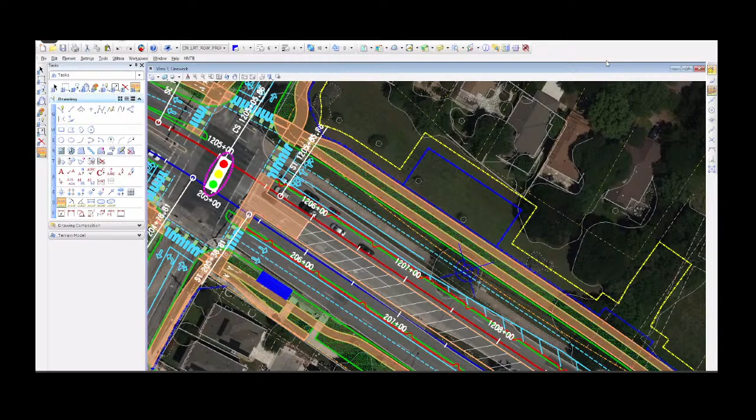No, a grade separation was not analyzed here, and it does introduce additional challenges. Everywhere you have a grade separation, you have to go either down and back up or up and back down, and that impacts and widens the footprint of the project. I think where you're probably talking about is Pleasant Valley—there's a big wide median in that location, which is one of the reasons it was considered as a design option there. Also, trains can't go up and down very quickly, both from the standpoint of the vehicles themselves and the design criteria, but also from a user ride comfort standpoint—going up and down a lot is pretty uncomfortable. So we tried to minimize those large changes in vertical grade and profile as much as we could.

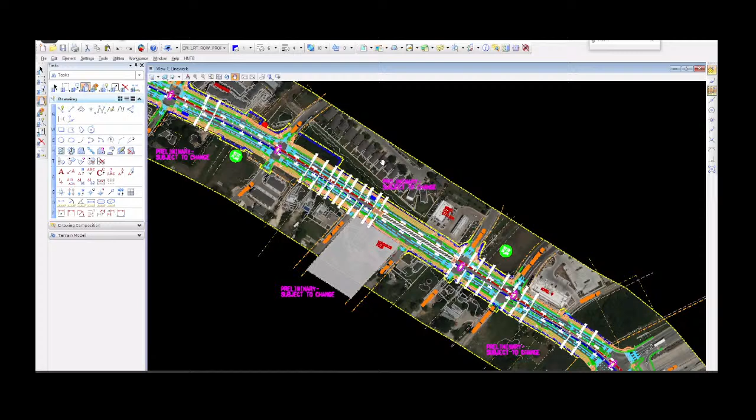Since we're right at the top of the hour, I wanted to answer Daniel Tristan's question about when we're going to talk about the rest of the rail. We host meetings all the time and would love to talk about more of the plan with you. We have an additional discussion about the Lady Bird Lake Bridge happening in late April. We're also planning to revisit Pleasant Valley and East Riverside again in mid-May. And we'll have a ton of additional Orange Line meetings, including covering things like the rail maintenance facility, which we didn't really cover today but may be near the airport, plus discussions about tunnels, vehicles, and systems in more detail. So there's a lot more coming.

The best place to stay informed is the Project Connect website. When you go there, the Get Involved button is sticking out in an obvious way because we want you to click on it. If you do, you'll see upcoming meetings you can register for. You can even go to the Public Engagement Library and see every single meeting we've hosted since the election, and even before that. If you click on any meeting, you can see the presentation and the video—so this will eventually be on this very page we're talking about today. On the Get Involved page, if you keep sliding down, you can join a working group, see what the Community Advisory Committee is doing, and see other meetings on our radar. And again, we end it with the Project Connect Engagement Library.